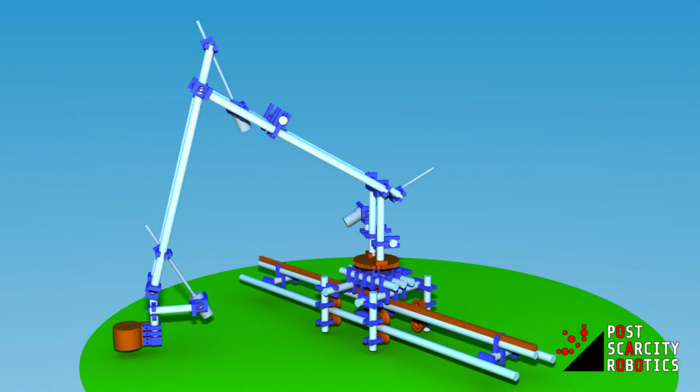This rail, imagine it to be, this is one section, imagine it to be several sections longer. And it's going to have on it an arm. I have a rendering of sort of what it will look like. But the next step for me now is to build the arm. And I call it also like the Lego kit for robotics. So I want to use a few

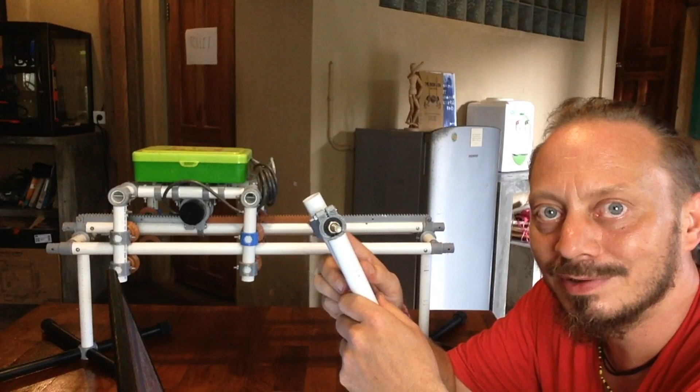generic 3D printed parts together with the PVC pipes, together with ball bearings as in here, and using these parts together it should be possible to get a robot to do actual real useful work like growing vegetables. So this is now going to be the next part.

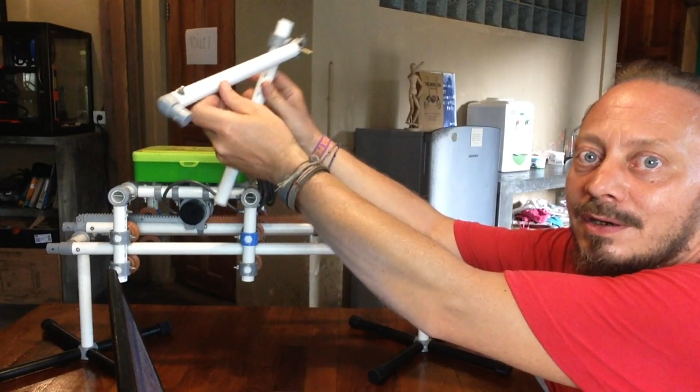The arm is somehow going to come here, and what I have tested here is just the actual hinging part. So I'm reusing this part here. It's the same as I can use also here. And so that works so far.

And then the actual thing that is going to make it move, instead of cogwheels and gears, which I think is going to be complicated to 3D print, I will try to use a threaded rod like this one. It's going to be much shorter. This is somehow going to be attached like a hydraulic thing in an excavator, but instead of a hydraulic thing it will be this thing spinning with a motor.

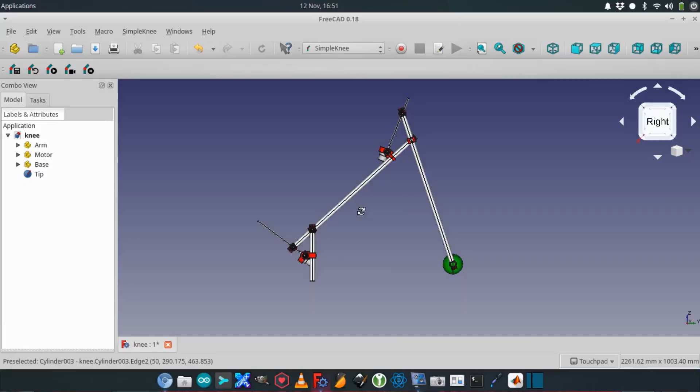And I've made a simulation in FreeCAD that I would also like to show you. So this is my CAD program FreeCAD, which is open source, and I really like it. And here I have a model of the arm. So again, the rail will then go down here, and here this is where the plant will be that it's going to be interacted with.

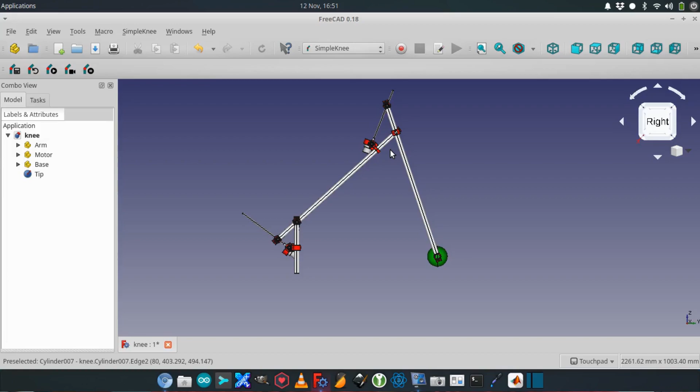And the challenge now is to first calculate the angles here and here. That's part of a much bigger problem called inverse kinematics that I've recently learned a little bit about. And inverse kinematics is a big problem, a huge mathematical problem. And I'm solving it a little bit differently, because for me it's important that I'm using as cheap hardware as I can, and my microcontroller that I'm using is essentially just $5.

So instead of solving the equations numerically, I am solving them analytically, which means that they will not be as generic. They can't have as many links as they could have had if it was a generic inverse kinematic solution. But anyway, I'm not going to go too much into that.

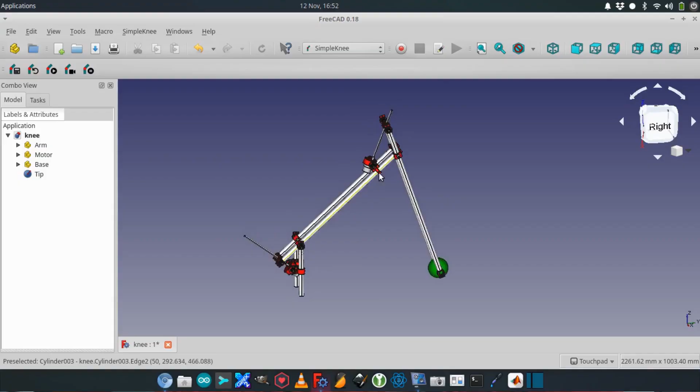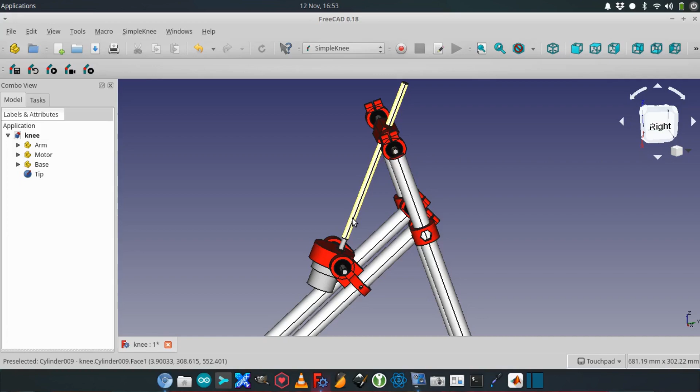But what this design is actually all about is this thing here. That's now going to be this thing here, and up inside of this thing, that's where the nut will be locked. Imagine that this part here is roughly maybe 20 centimeters, so about this long. I'm going to cut this off and attach a motor here that can spin.

I can spin this, and I think that's going to be a cheap and easy solution, and avoid having complicated mechanical parts, because ball bearings, PVC pipes, and 3D printed parts, that's what I want to build my robot out of. But anyway, in the simulation that I've made, I can just move the ball out here and see how the other things follow.

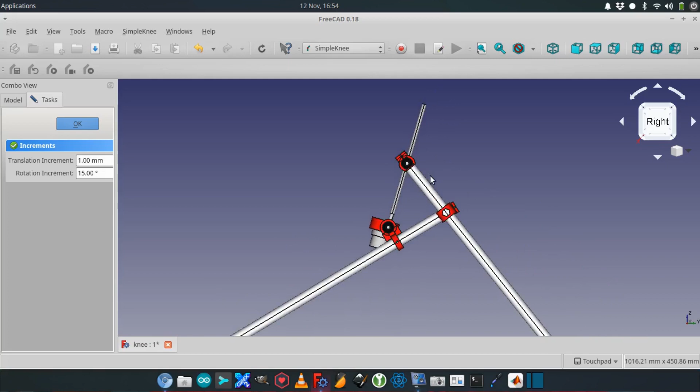And there will be a few calculations that I'm doing here. First I need to calculate the angles over here and over here. But then, since I want to use this approach with a rod that sort of pulls the arm in, I will have to calculate also the length here, given the angle here. What's going to be the length here? And then I can divide that with the distance for the grooves here. And I can't see why that wouldn't work.

And that is the thing that drives me forward. I really want to see this thing work. And at the same time, I thought I would be done by now. I'm not. So slowly by slowly.

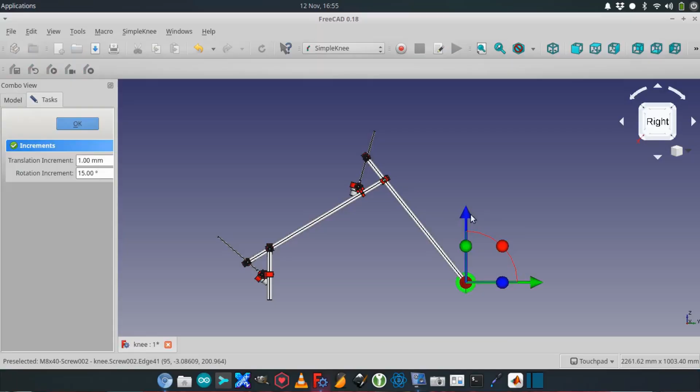But I'm reaching out as well. Whoever wants to help out with this project and is excited about robotics, and especially how robots can be used for everyday problems, or how robots can be used by us all to create individual freedom and create a world where we are just allowed to be without having to buy into the system. Can I say that? Yeah. If that way of thinking appeals to you, then that's what this project is all about.